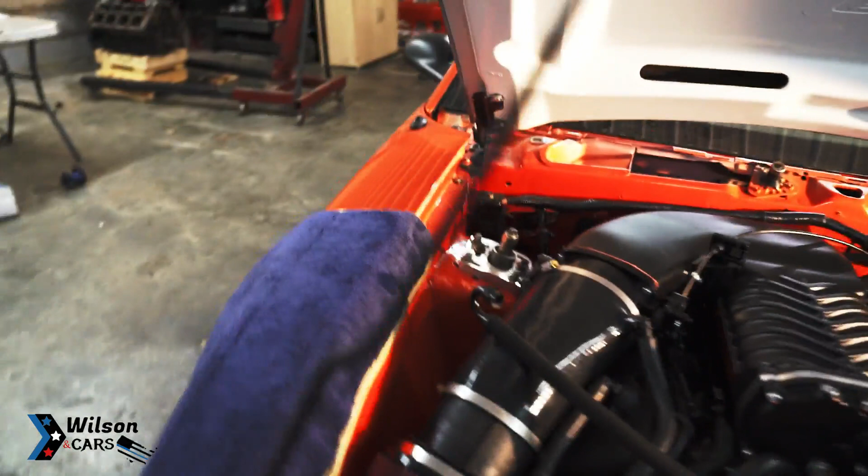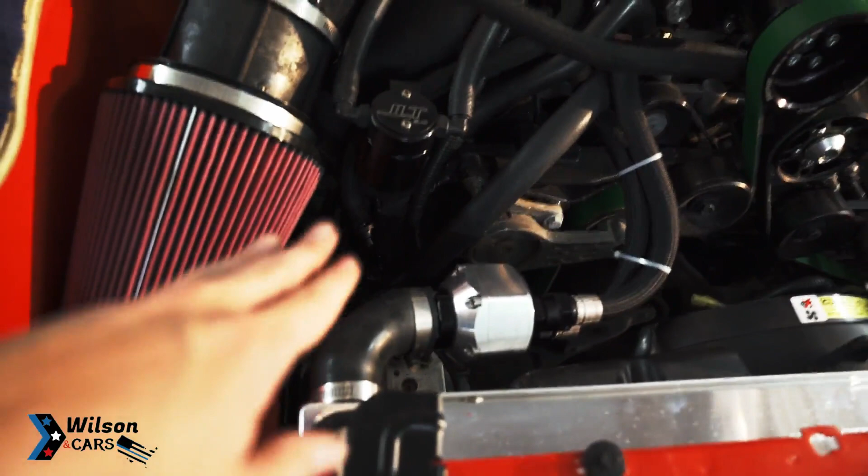Alright guys, another day, try to get this thing fired up. Tuesday night's not going to happen. I found out some problems here. If you look right here, you can see there's separation. It looks like down here by the regulator, where I mount my regulator down here in the bottom. I don't know if it's getting heat to it or what's going on, but the hose is starting to separate.

So, being that the hose is separating, I really don't want to take no chances at the drag strip like that. I didn't notice it before, but I am going to go ahead and hook all this stuff up. We're going to fire it up today. Go ahead and get the radiator filled up, get the water circulating through it, make sure there's no leaks, make sure that the crossover delete kit and all that stuff does its job. We'll let it sit here and idle until it opens up the thermostat, or until it seems like it's going to settle on a temperature, and then we'll go from there.

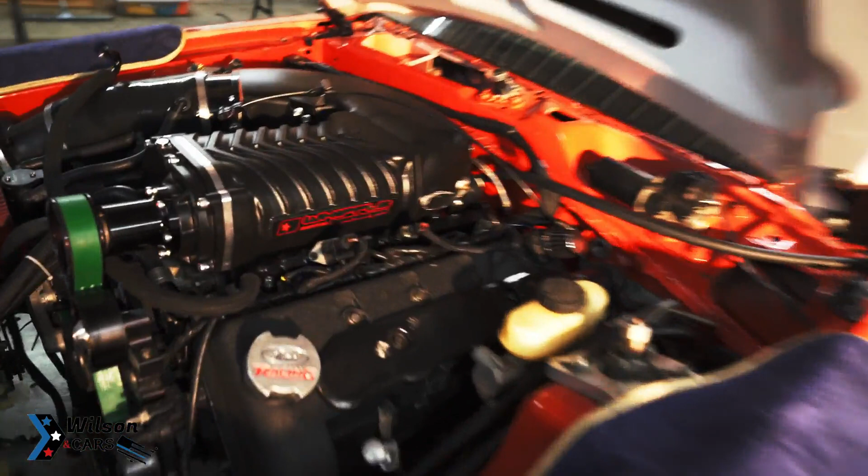I've still got to make an EGR delete. I'll probably order one, but I'm gonna go ahead and make one for now just to cover up the hole and seal it off, because I don't use EGR. And then all I gotta do is put the radiator hoses on the bottom, and we're ready to fire this thing up. We'll get in there in the old Haltech ECU and put in our injector data.

And I'll probably go ahead and take the IAC and crank it back a little bit to where it's not open, because I've been hearing people having issues with these Gen 5s where they're getting a high idle. So I'm going to take the IAC in the Haltech ECU and just kind of turn it off for now. Basically what I'm going to do. So I'll be right back. Let me get all this stuff put on and we'll fire this bitch up.

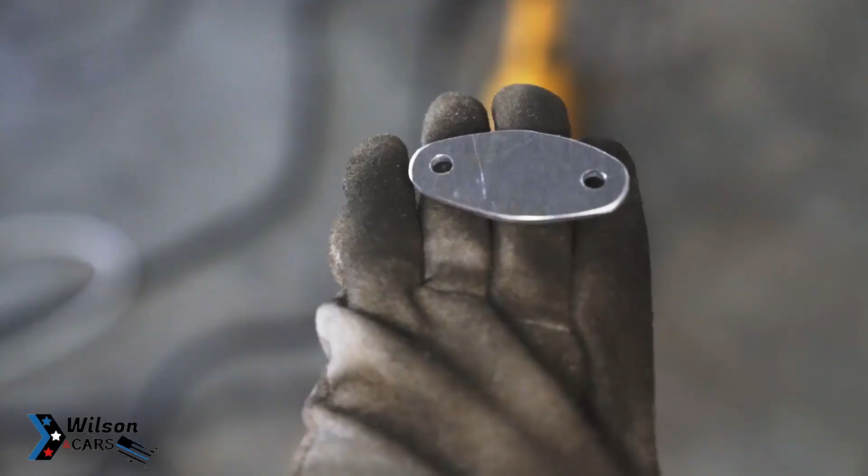Just like that, we made us a dang EGR delete. Cut it out right there. I'm gonna go over here and smooth it out with the flap disc on the grinder. As you can see, sometimes you just gotta make stuff, guys. No matter what, if it works, it works.

Okay guys, we're to that point. I gotta run to town real quick. I've gotta get a gasket for the IAC side over here, and then I gotta get a gasket for my EGR delete, because I don't have either one of those items. Everything else is tightened up, ready to go. The battery is in the back charging up. That's another thing I gotta change back here now that I'm thinking about the battery. But the battery is charging up.

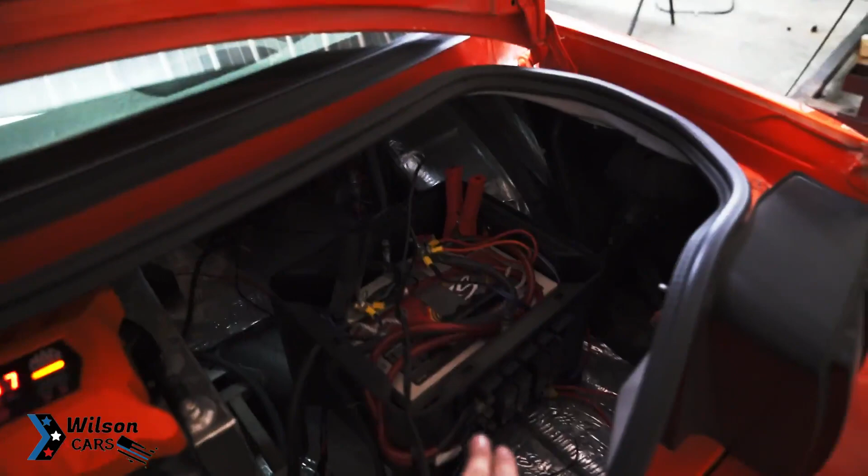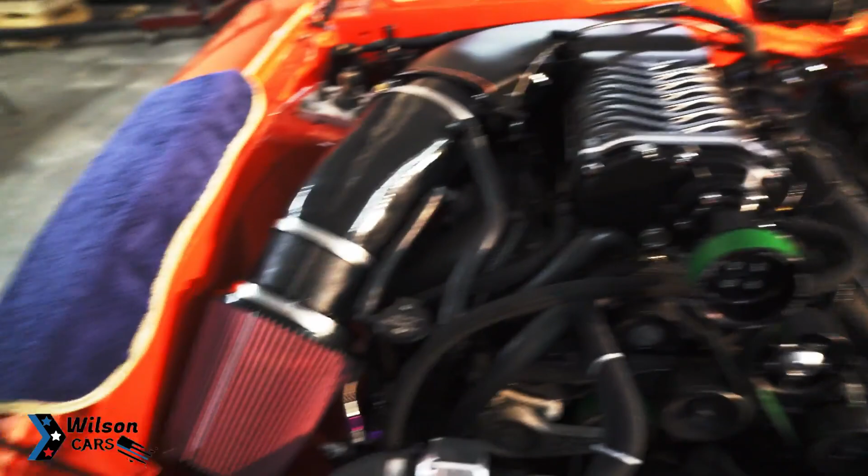I still gotta do some relay changing on the MagnaFuel; they call for a dual relay setup, so I'm going to go ahead and wire the other relay in with that just to cover my ass, because that's one thing that they said maybe caused my fuel problem, and we'll try that. And then I got to try a 25 micron fuel filter, but we'll save that for another day. Right now everything is ready to rock and roll. All the fittings are tight and everything. Like I said, I got to run to town real quick, and when I get back we'll get onto the laptop and put the injector data in, see if it'll fire up.

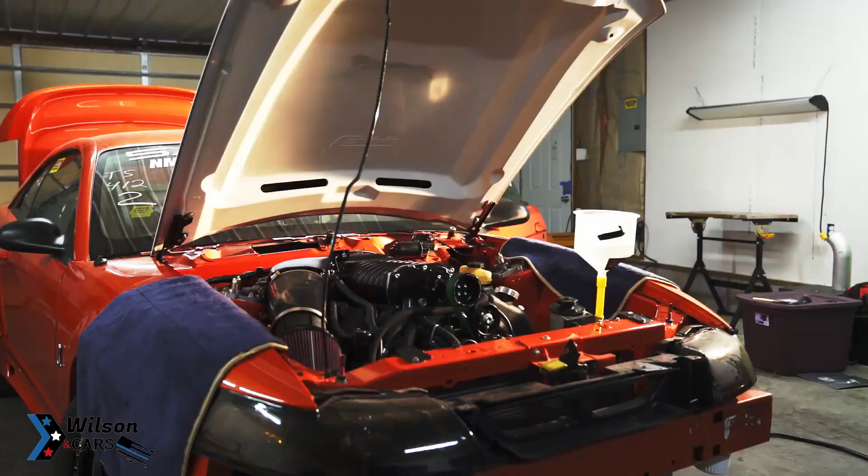I'm getting ready to key on the ignition, and then I'm going to come back out and kind of see if there's any leaks, hearing leaks on the fuel system before I get crazy. And I also got the intercooler tank filled back up, the ice tank's filled back up, so we'll let the intercooler circulate and check the water and all that crap. So here we go. Check and see what we got going on here. I definitely smell some E85 already. Huh. That's awesome.

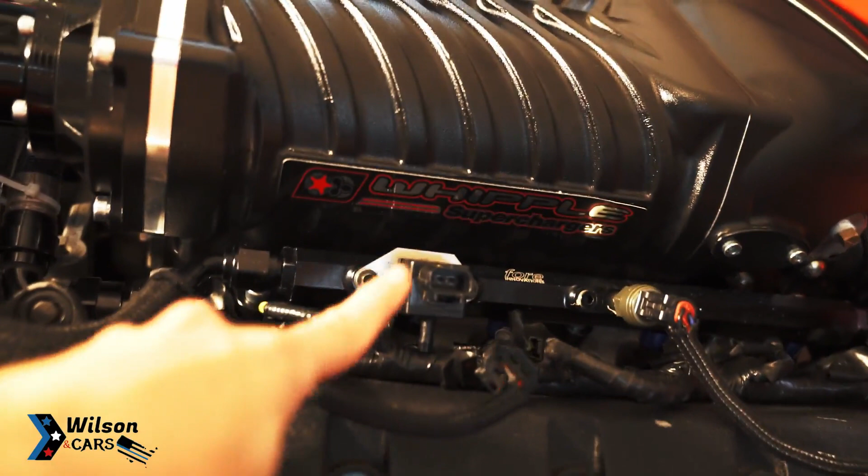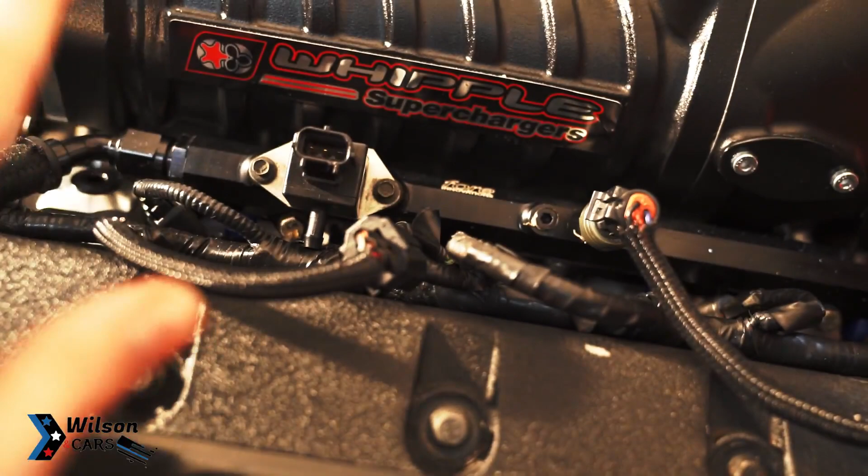That's awesome. Okay, as you seen yesterday, you heard the fuel injection system leaking. It was the factory fuel pressure sensor right here. The O-rings went bad in it, I guess, from sitting, and I changed those out, and that took care of that problem. Essentially, I thought every injector was leaking, but it was not. It was just this. I could not catch it quick enough because I had to key the car on, and by the time I walked around and looked at it, it was already off, so I couldn't really tell exactly what was leaking. And something else I don't like about these injectors.

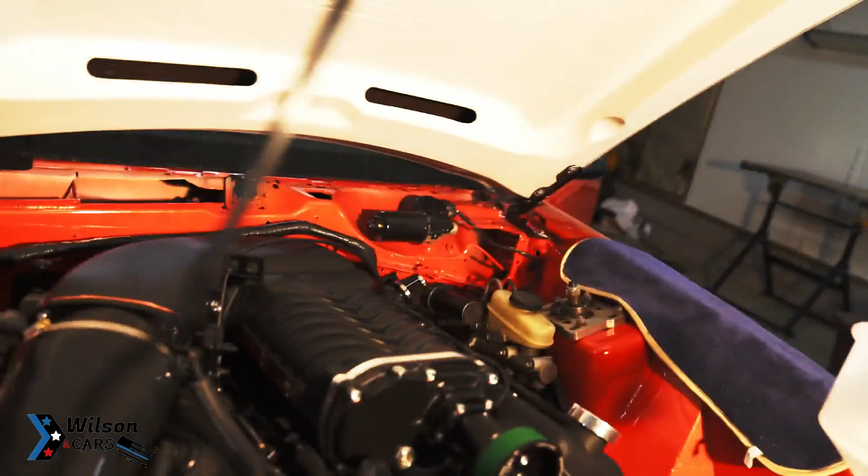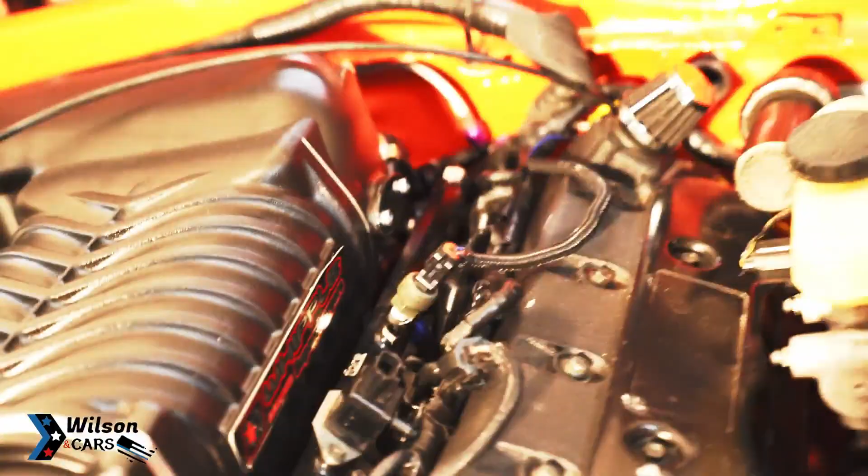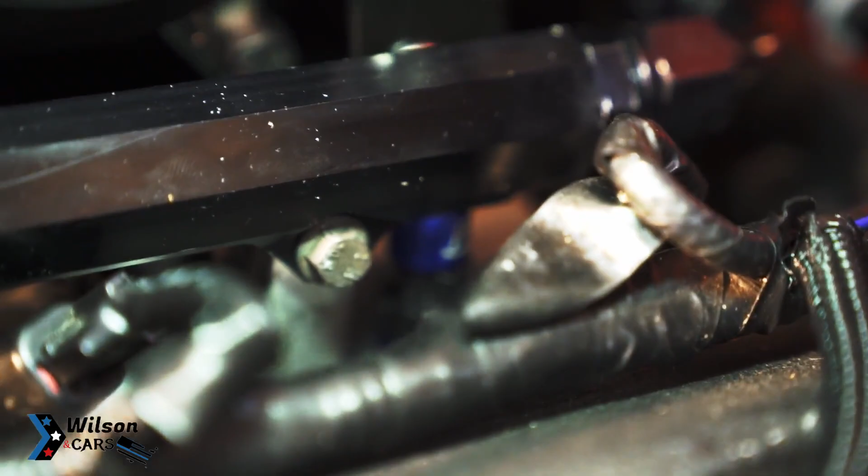These injectors, you know, I'm not knocking nobody, but they have a hat on the top and the bottom. And what I'm noticing, at least in my setup, if you look, I'm gonna get a good view of one possibly. Right there. You see the top hat extension right there, and there's one on the bottom right there. What I'm noticing on this is that these things are extremely picky. They're extremely picky on the 03 Cobras because of the way that the angle is on the fuel rails going into the injector bosses on the intake manifold.

And they kind of kick sideways and stuff, and you got to watch what you're doing because they'll just leak right past the injectors. And I don't really care much for that because I don't know if they'll move while I'm driving the car or at the drag strip or whatever, but I had to physically come out here and move them around a little bit to get them to seat right. And hopefully they'll stay that way. They quit leaking except for one. I'm gonna take that one off and we're gonna put a new O-ring on it. But I don't really care much for that.

And they don't have the clips to hold the top hat on the injector body to keep it straight. And that kind of throws me off too. So just be warned on something like that. I know a lot of people probably run these injectors, and I have never heard of a bad thing about them, but I also don't know anybody running them on a Cobra, so there you go. I just thought I'd inform you.

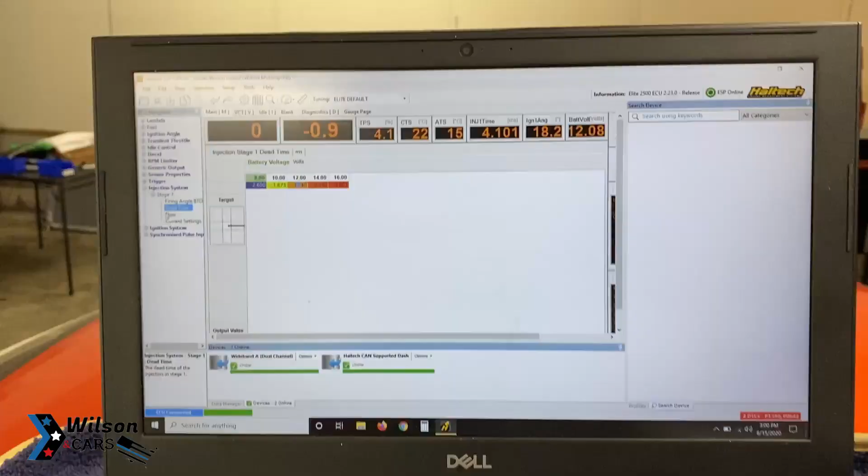But right now I got the computer up here. I'm getting ready to do some work with it. As you see, I got the old Haltech ECU fired up, ready to go. All right, guys, we got the Haltech ECU booted up. As you see over here to the side on the drop-down menu, I'm in the injection system, stage 1, and at the dead time. As you see, we got voltage going across the top.

Well, those voltage numbers are going to match up with these 43.5 PSI numbers on the FIC sheet. As you see, we got 8, 10, 12, 14, 16, just like we do over here on the ECU. So we're going to enter all these numbers in those columns onto the Haltech ECU, and then we'll be ready to go. The reason why I'm at 43.5 PSI is that's where my base pressure is at.

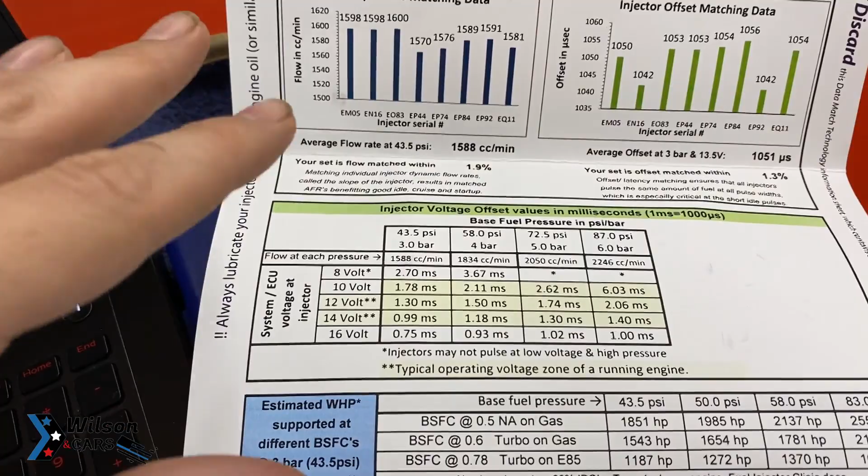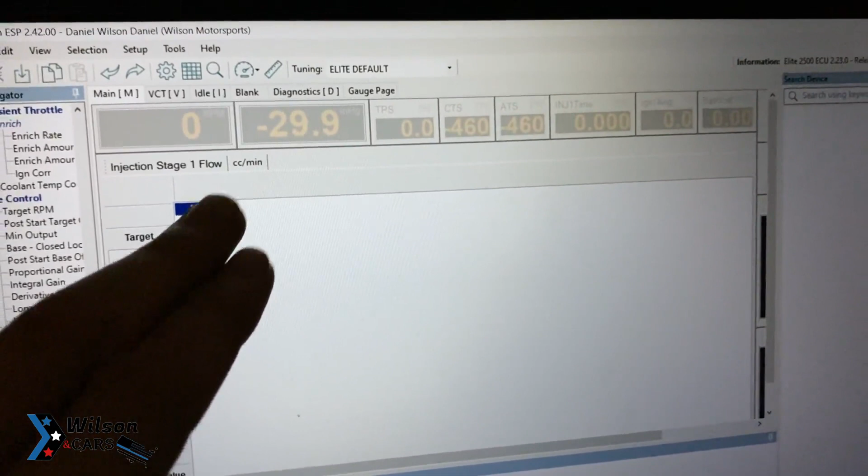All right, guys, I gotta throw this in real quick. The car's obviously already started. I'm in the house getting ready to edit this video, and I forgot something very important. In the injector data, we need to go into the Haltech ECU and go down to flow, and then enter in 1650 cc to match the injectors that we're using. So now the computer knows that we have 1650 cc injectors.

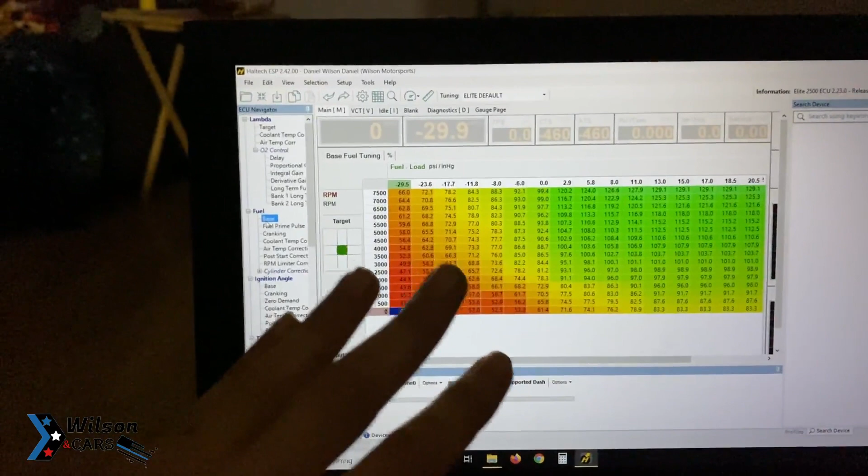And now that we got the dead time installed, that means we shouldn't have to make any changes whatsoever to the base map, which is this right here. We shouldn't have to make any changes to this at all. By just putting in the correct injector data, the computer should do everything else for us. The moment of truth, here we go.

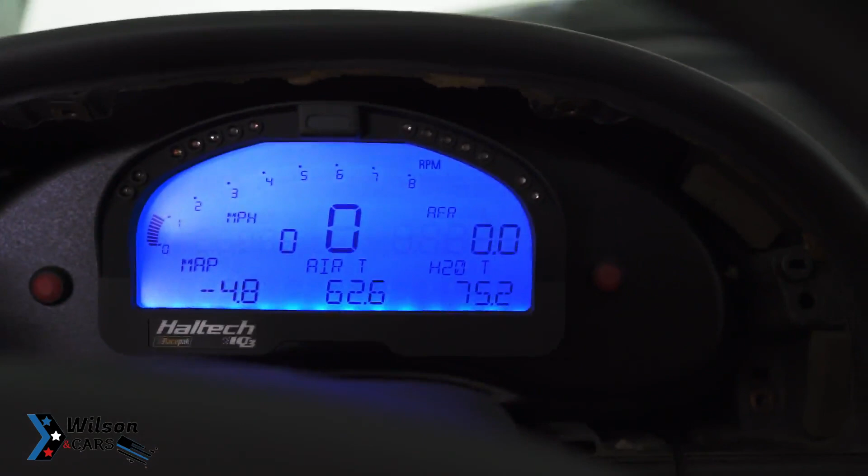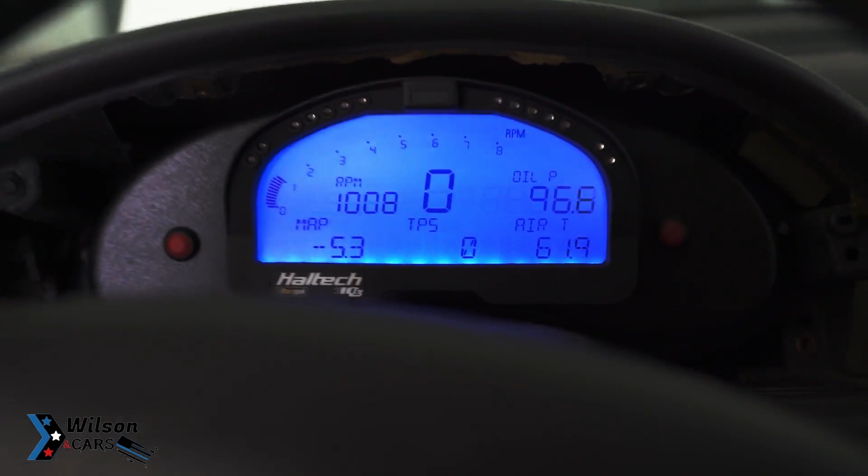Like that, we're rolling. 96 oil pressure, looking pretty good. Hell yes, we're freaking rolling, boys. Let's go out here and check everything out. Everything's okay. I don't see no leaks yet. Fuck yeah. Man, this thing fought me so hard. Oh my God, it fought me so hard. It's awesome.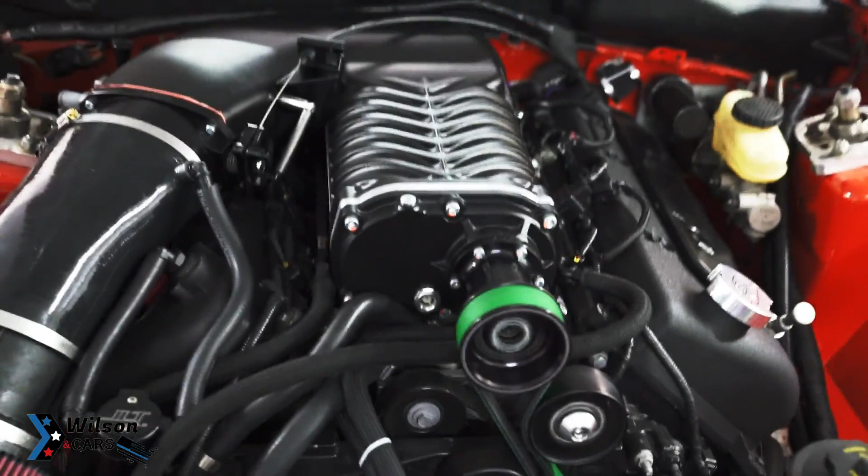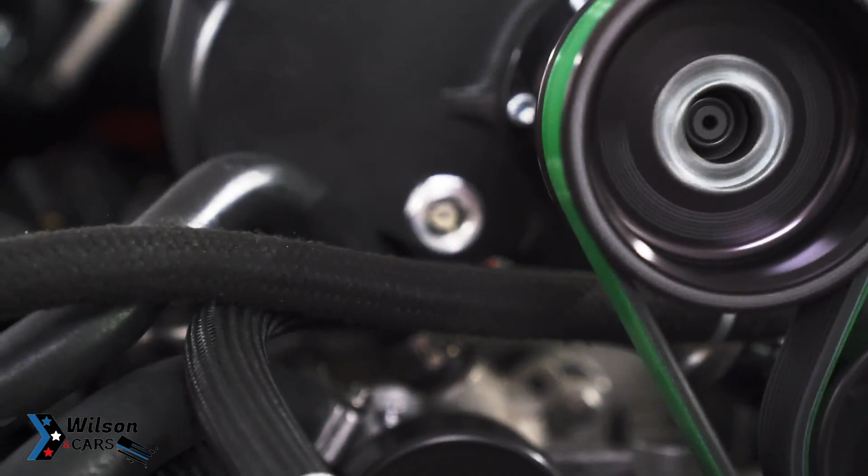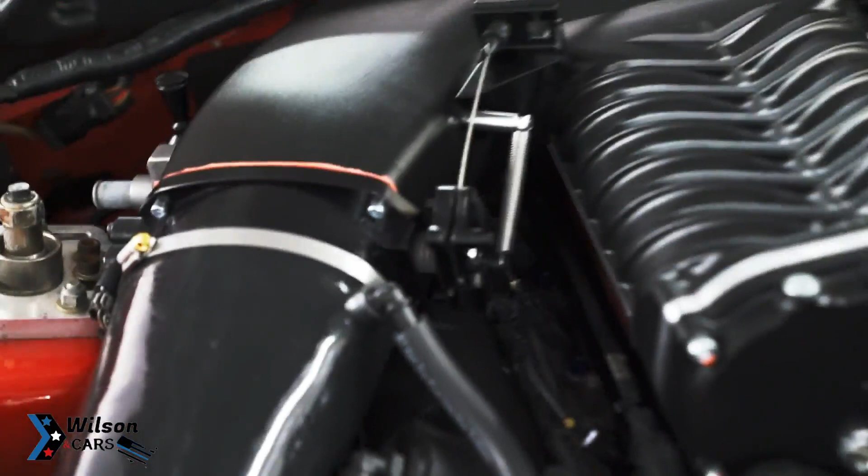Let's check the oil level real quick. It looks like the oil level, I may got it just a tick high with it running. When it's off, it's perfectly fine, but when it's running, it looks like it might be a little high. I'm gonna double check that on the instructions. Also, I'm putting a return spring right there. There was no real good instructions, so I hope it's right.

But anyways, guys, she's up and running. She's fired up. She sounds great. I think we got it all rolling. See if you can hear a good sound of it.